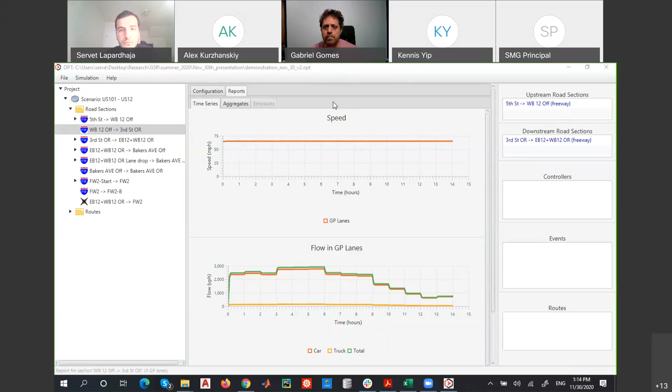Also, turn off your video because your voice is staggering. Okay. All right. Do you hear me better now? Yes. All right. Thank you very much.

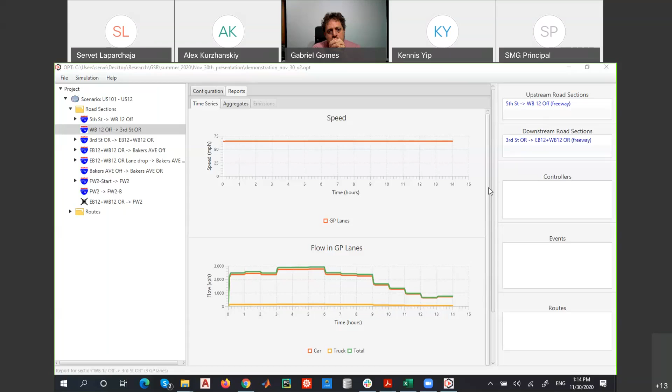So moving on, we can see also the corresponding plots at the link level, and specifically, we have a time series plot for the speed at the selected link. We have the observed flow on that link, and the number of vehicles that we have at that link for every time step.

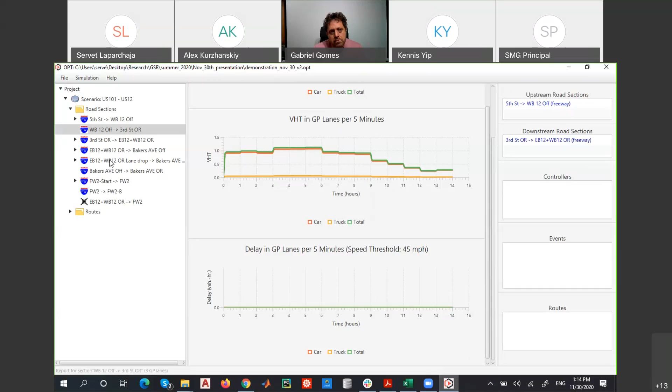At the aggregates, again, we can see the VMT per 5 minutes, the VHT per 5 minutes, and the delay. Well, at this section here, we do not have congestion, so we will not observe delay. But let's go to a section where we have delay. We can see here the delay.

And of course, we can create routes at OPT. Specifically, if we go to the configuration here, we can click from which section we would like our route. For example, from this one until this one, and we can change the route, and of course we will obtain the corresponding reports. So just take the entire thing here.

And if we go to the report, we have a speed contour plot, and obviously we can see here that the bottleneck is located right here, and how much the queue length is, and we have also some other contour plots, which show us the flow and the density on our lanes. And as it was on the link level, for the specific route that we selected, we have the VMT every 5 minutes and the VHT every 5 minutes, and of course the delay.

The good thing about OPT is that we do not limit ourselves to just observing this, but we can also export the results into an Excel. So, for example, going to here, we can export the results for our route that we created. You see here. So let's open this. And all the information that we had previously for the route that was visualized, we have it also in an Excel.

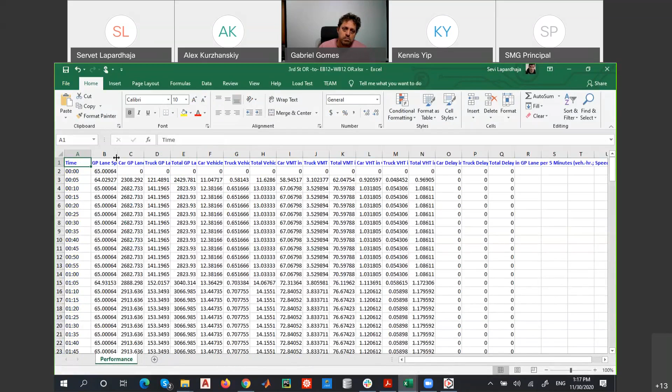So every information that we see here is available, and we can specifically click on them. For example, on the link that we selected, we have here the speed, the flow, the number of vehicles, VMT, etc., and all the performance metrics that someone needs in order to make some evaluation.

So basically, this is the first part of this demonstration, where we showed how we can obtain these results for the link, route, and scenario level, and how we can export them to a spreadsheet in Excel.

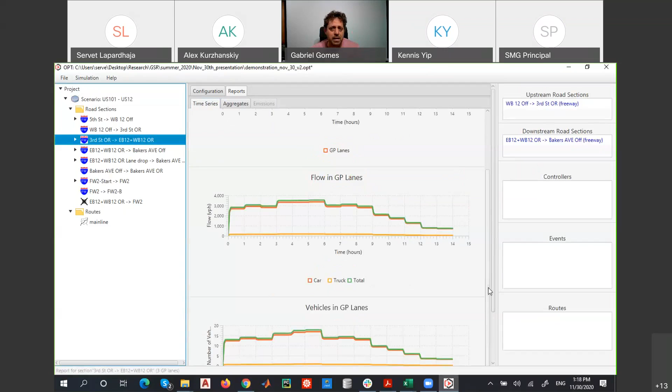Servet, I'm going to interrupt you there for a second. Yes, please. We have a couple questions, so we'll just address these quickly. So from Maurice, briefly, how is the VMT calculated? Also, can the VMT be automatically summed up to hourly, daily, annual? So, well, one, we are going to prepare a document with all of the algorithms and all of the calculations that are done, and we'll include that in the document.

But just to answer your question, VMT is calculated as the flow through a link times the length of the link, and that for 5 minutes, for example, is the vehicle miles traveled for that link over that time. And then if it's a route, we can add it up over the route. And if it's the network, we can add it up for the whole network.

Can it be calculated, summed up automatically? Well, there are a couple ways to do that. One is to export it to Excel and then sum it up in Excel sort of manually. But if you wanted to do it automatically, there's a file with user settings, and right now the summation period is set to 5 minutes, but it can be changed as a user setting. So it can be summed up to hourly or daily.

Actually, daily would show up in the pie chart that we have at the beginning for the whole network. Now, annually, we're only doing 1 day at a time. So annually would have to be external, that's for sure.

And then the second question is, can you explain the concept of routes? A route is just a sequence of segments. I think this will become more clear in the second demo that Servet is going to do, where he constructs a scenario from scratch. And a scenario consists of these segments that are similar to FREEVAL segments. So a route is just a sequence of segments.

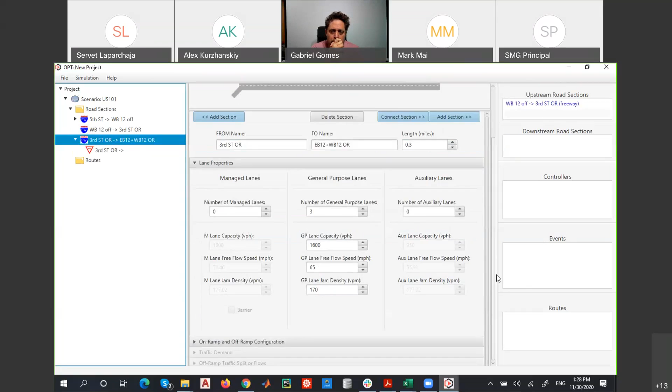And Servet, click on the scenario so that people can see what comes out when you edit several sections. What sort of network comes out? Oh, sure. Every time that we add, we have the sections here. For example, the first one, we click here and it redirects us to our first section. We can click on the third one, the last one that we made, and it will redirect us here. So this is very good navigation, especially when the network is pretty big. We can click on any section, be redirected there, and edit the lane properties or anything else that we would like about that section.

The next one will be Bakers Avenue off-ramp, and this one will be 0.37. In this case, we are going to have 4 general purpose lanes, and we are going to add an on-ramp, which is going to have 2 general purpose lanes. And we can see it's also displayed here, the 2 general purpose lanes of that on-ramp.

Then we can go, excuse me, 1 second.

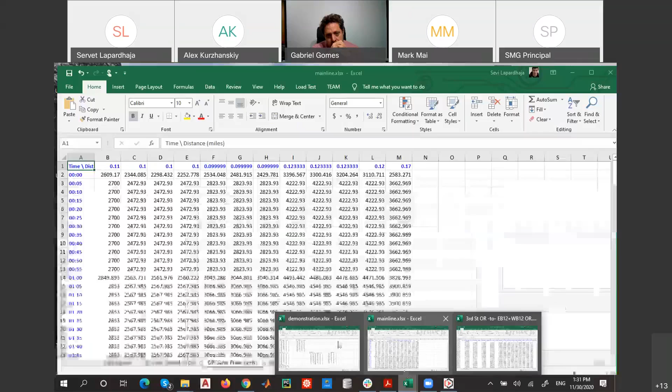On-ramp, and it's going to have 0.17. So now that we have set the network for our first freeway, practically we can go and start inputting our traffic demand on the main line. So we go here and we said for our case we're going to use a demand update period of 60 minutes, and we can simply copy and paste our values from a spreadsheet as I copied it, and just do Control-V and paste them here.

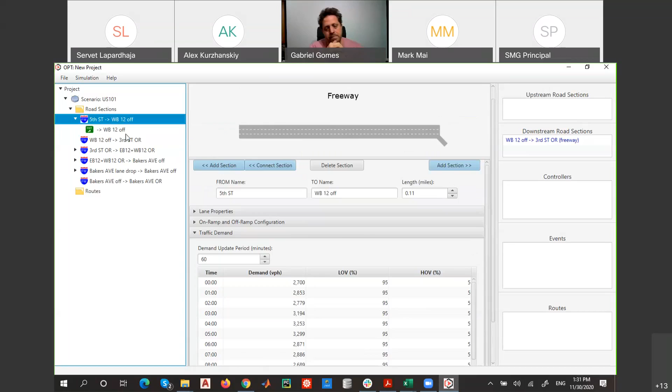So it's pretty easy. Because through PEMS we can extract similarly CSV files, and we can use them directly in order to input our demand on our freeway. So we input it here, the demand on the main line. Then we go on our off-ramp. In this case, I'm gonna use split ratios for this. So we're gonna set the split ratio for LOVs and HOVs. And again, just by simply copying.

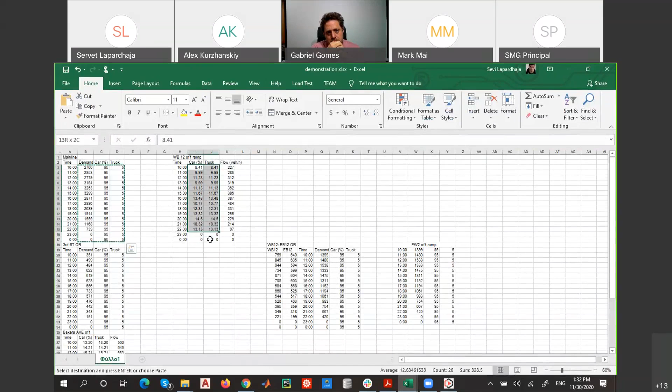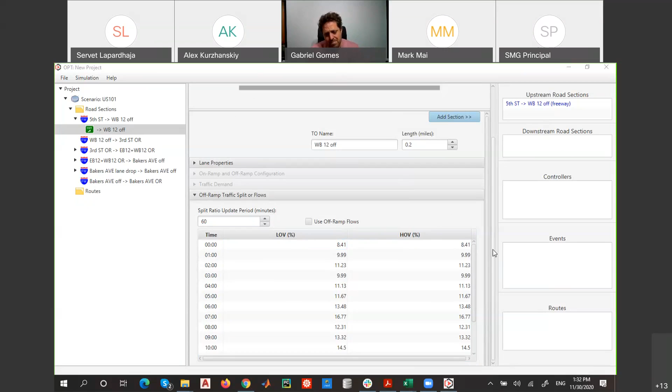Yes, I have a question. Sure. What's LOV? Low occupancy. Is it a general purpose lane? Can you repeat one more time, sir? Is LOV the general purpose lane? No, it's a type of vehicle. We made our vehicles to have 2 types: low occupancy vehicles and high occupancy vehicles, just for the sake to have multiple commodities. You can have even trucks. You can set any type of vehicle in the simulation.

So this is a vehicle type for either the managed lane or the mixed flow lane. Right now, we are presenting one type of lanes, general purpose lanes. In the next part, Gabriel is going to present the managed lanes and what we do with managed lanes. Okay. Yeah. The lingo is SOV, by the way. SOV. Single occupant vehicles. Yeah. Okay. Thank you very much.

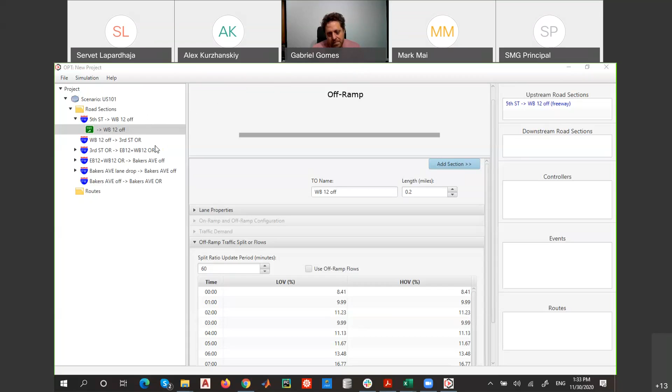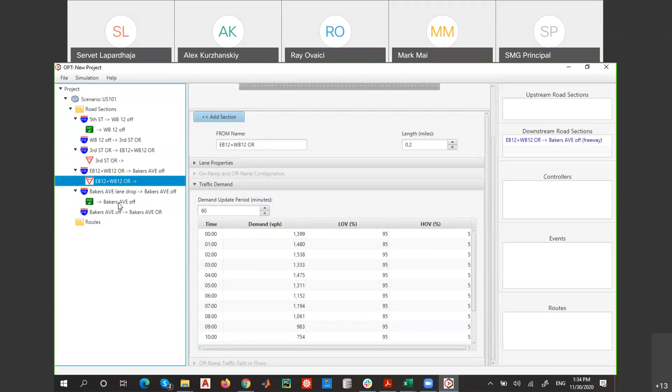So we are adding also the traffic demand on our on-ramps, again, just by simply copy and pasting the values from a spreadsheet. And what you need to mention here, Servet, is that granularity. We set our demand update period at 60 minutes. For example, if I make this 5 minutes, the granularity, as you can see, changes like 0, 5 minutes, 10, 15. So you can set the granularity at any value that you want. Finally, these off-ramps here. And again, we set this 60. As we mentioned earlier,

at OPT, first of all, here we can see the first freeway and all the segments, so you can click at any of them. But going back to what I was about to say, at OPT, we have the capability to make also a second freeway which is connected to our first one. And this can be done just by simply selecting either an on-ramp or an off-ramp. So in our case, we are going to use this on-ramp, and we are going to click Add Section. I'm going to call this Freeway 2. So it creates a connector. And then we click again Add Section from the connector, and I can call this Freeway 2 Start.

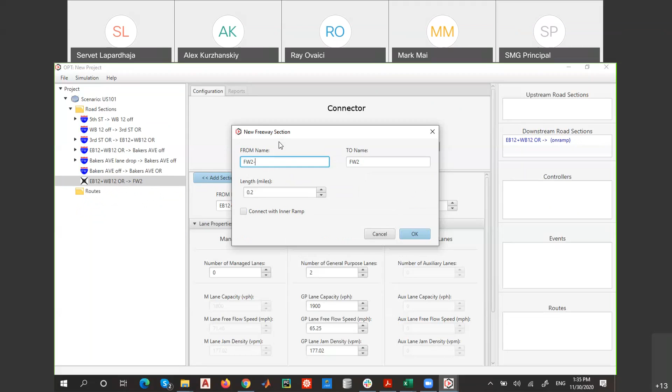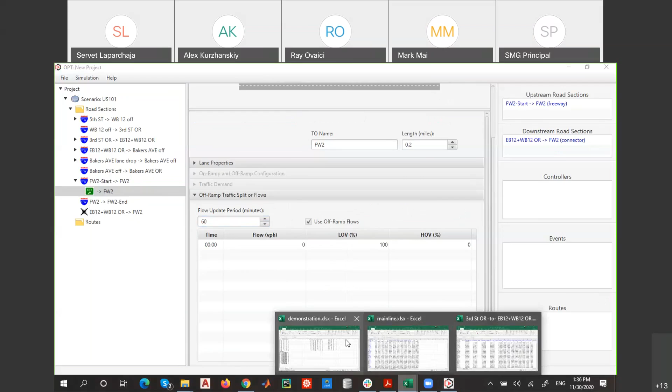As you can see here, now the second freeway was created, and it has an off-ramp which sends traffic practically to the first freeway, and they're connected through these blue segments here. And let me add another one downstream of it, so it's going to be Freeway 2 End. So on the second freeway, as I mentioned earlier, we create an off-ramp, and on that off-ramp, we are going to add the flows. In this case, if you recall before, we inputted the flows with split ratios, but at OPT, we have also the ability to input our flows using off-ramp flows. So I just click off-ramp flows, set my demand period, the granularity, and I can go here and just by simply copy and pasting the values from a spreadsheet, I can input them here.

Servet, explain that here you have total flow, and by type of vehicle, you have percentages of the total flow for the particular vehicle type. Sure, thank you, Alex. Yeah, so for example, in this case, we have at this time 1,400 vehicles per hour, where 95% of them are going to be single occupancy vehicles, and 5% are going to be high occupancy vehicles. Thank you for adding that, Alex.

And also, at the end, we can create a new route. I'm going to call this test route, and we can select from where we would like to start our route. For example, in this case, from 5th Street. So I just click 5th Street, and which is going to be my destination. So I'm just going to select the last section, for example, on my first freeway, which is the Bakers Avenue on-ramp. So as we see here, we have our route, and we can of course select any section. I can just select this one or just this one. We are not limited, and when we run the simulation, we are going to obtain

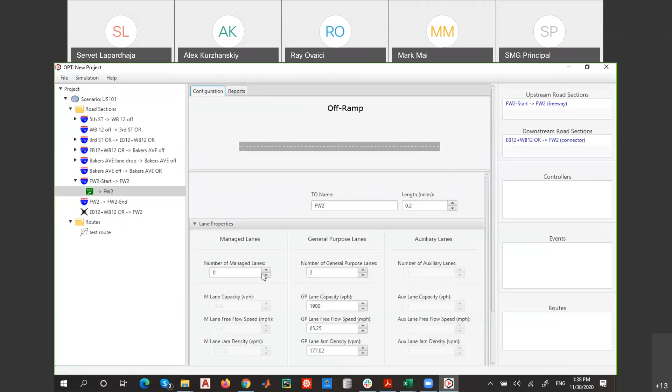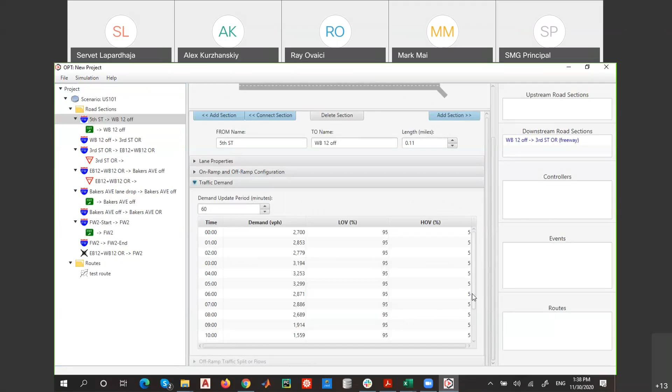Yes, the reason why you have routes, not just a network, is because if you have multiple freeways and you want to look at linear segments from point to point so that you can have contour plots, that's what routes are for. And even for a linear network, you can have one route that spans the whole freeway, and you can also have shorter segments of the freeway as your routes, just to investigate what happens on those shorter segments.

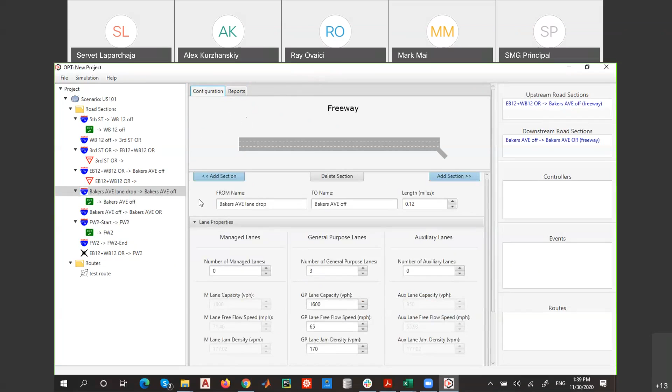Yeah, that's right. So in general, that was a simple demonstration of how we can make by ourselves a network at OPT, and then analyze. And of course, we can go to every section, as I mentioned earlier, and obtain our performance metrics for links, routes, and as well the scenario. So now I'm gonna pass it to Gabriel, who's going to talk about HOV lanes and HOT policies.

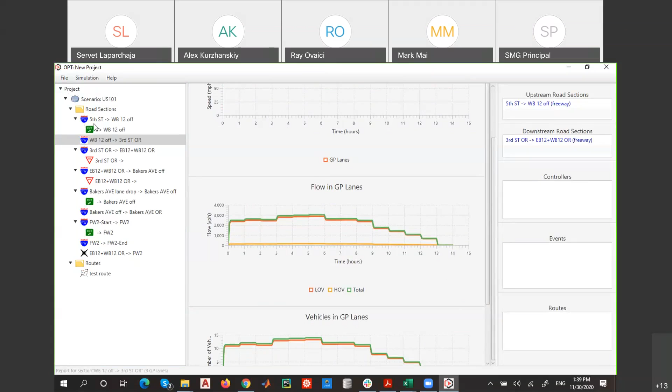Okay, thank you, Servet. That was great. If there's somebody not muted, I'm getting a little bit of feedback.

So Diane asked, can we use connect sections to add a parallel collector with ramps from and back onto the freeway? So the answer is yes. This is what Servet did in his example, and I'm going to share my screen now. Let's see, share. Okay, so this is what Servet ended up with. And you see here, we have 2 freeway segments.

And what this is showing is this blue off-ramp is in fact connected to this blue on-ramp for this freeway. So the demand from this section, a part of it is going to exit this off-ramp and enter this on-ramp. The reason we did it this way, that you don't see them as physically connected, is because we can create any number of connections between freeways and any number of freeways. And so it would be very, very complicated to find a way of sort of subway mapping that in.

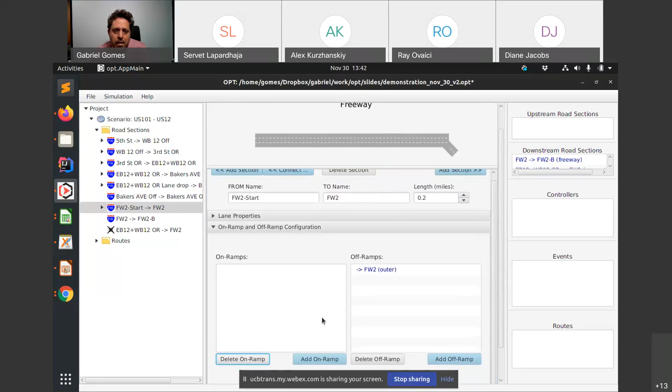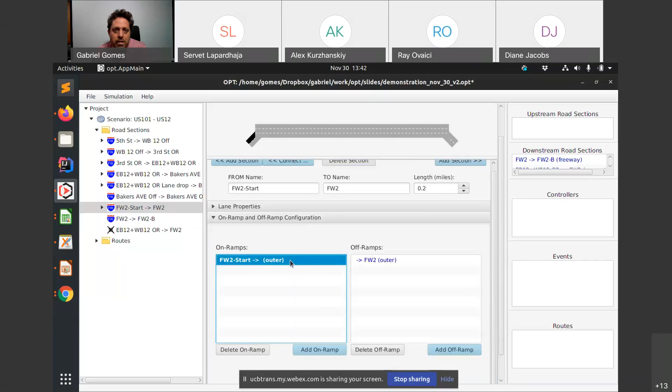And then let's say over here, there's an on-ramp. Yeah. Okay, and so now this is the on-ramp that I've added, or I could have used this off-ramp as well. So now here's my on-ramp to the collector, if I'm understanding what you mean by that, and so I go to the on-ramp, and I add a section upstream, and that section upstream of the on-ramp will be the connector section. So here I could give it any name I want, and so that's the connector.

And now I have to connect that connector up to the off-ramp. I just say connect, and I choose which off-ramp I'm connecting to. So let's just choose this one. And if I go here, I see that this is now color-coded with green. It connects to this one, and then vehicles are on this side freeway, and then they can exit and come back here. Great, thanks. That was what I was asking.

Yes, and in this case, this also creates an alternate route. So potentially, if you start from point A on the main freeway, you can go from point A to point B, which is at the end of that first freeway. Right. Routes. I can come here and create a new route, and I can say I'm going to go from one to the other, but I'm going to use the connector. Yeah. Anyway, somehow you can make the alternate route that is going to come here, and you can evaluate the delays on either route.

But we'll have more instructions on that. I think we're running a little bit short on time, and I wanted to get to questions and answers.

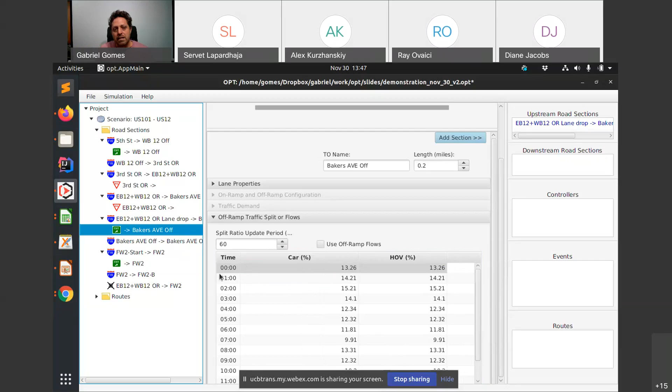And here I'm going to put that of that, 70% are cars and 30% are HOVs, because that's what's representative of the whole population of vehicles. And then finally, there was this traffic demand on the second freeway, and I also want that to be 70% and 30%. So now I have changed the demand picture so that it is 70% SOVs and 30% HOVs, and I can run that again.

So this is a 14-hour simulation. I get a contour plot, which is similar to before. But still, we are dealing with just a uniform general purpose facility. What we want to do is convert one of the lanes into a managed lane and see how that is going to change the behavior. So how do we do that?

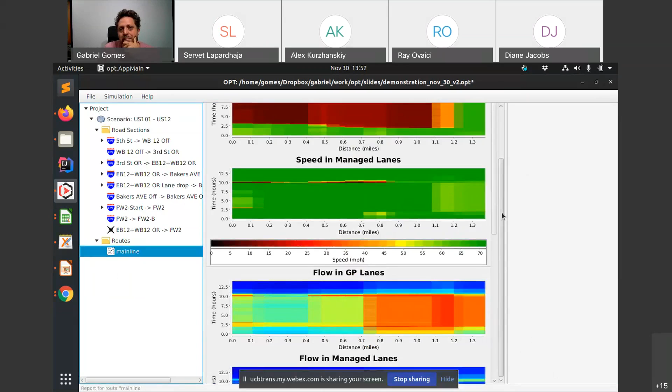Oh, sorry, and Gabriel, you double click on each of these entries and edit. Basically, you will edit the times, etc. That's right. That's right. So now look at what has happened. Something terrible. I kicked all the cars out of the HOV lane, and I noticed that there's a huge bottleneck that creates a disaster. And that, if I look at the configuration, is because there's this 2-lane bottleneck here that is creating a huge pileup.

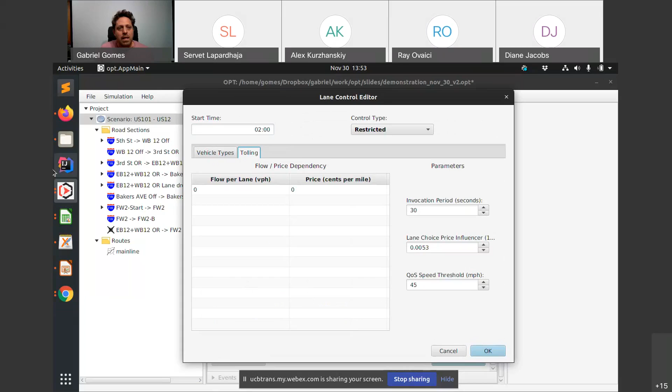And so my final thing that I want to investigate and demonstrate here is, okay, it was a bad idea to throw out all of the cars. Let's allow them to use the managed lane, but we're going to toll them. And so again, I go to my policy, and I'm going to double click. And instead of banning the cars, I'm going to toll them. And how am I going to toll them? There's a tab here where I'm going to enter a table, and the data for my table is right here. So I copy this data, and I'm going to paste it in here.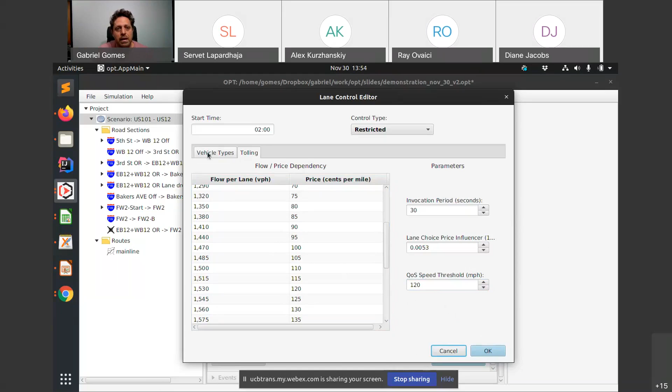And what this says is that if the flow in the general purpose lane is low, then it costs very little to join the managed lane. And so this is a flow to price table. And then there's some other parameters here that we'll explain later. This actually I have to change for it to work correctly. And what vehicle types are okay? So it's that. Basically, I'm going to allow cars to use the managed lane, but they have to pay. So let's simulate that again.

And finally, now, I should have shown before that there were no cars in the managed lane. This red line had dropped to 0 between 2 and 10. This red line, the flow of cars, had gone to 0 in the managed lane. But now we see that many cars are actually opting to pay because they can save a lot of time. And so we see a significant number of cars in the managed lane.

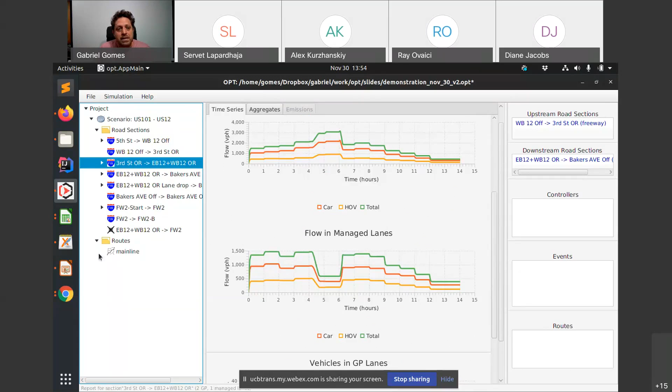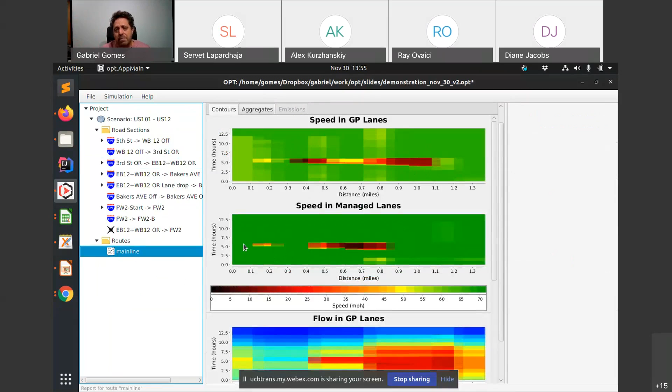And if we look at the contour plots, well, it has substantially improved the congestion because lots of cars are opting to use the managed lane to sort of circumvent that bottleneck. So this is the kind of thing you can do. You can then go to the totals, the scenario level, and look at how the VHT has changed, how the VMT has changed, and so forth.

So we only have 5 minutes left, and so I think it's a good time. Well, let me just mention here. We actually have till 2:30. Oh, we do. Yes, but go ahead. Yeah, it would be good to. Okay. Great. So we have a little bit of time, but I'm going to switch over to the slides. Somehow this is... Oh boy. This is not working. View. Okay.

Okay, so here, that is where we are in terms of hot lane modeling. I mean, there's a lot more there to explain all of the details of the parameters and how to calibrate it. But we're going to include all of that detail in our documentation. And of course, if you have any questions, we're very happy to address those.